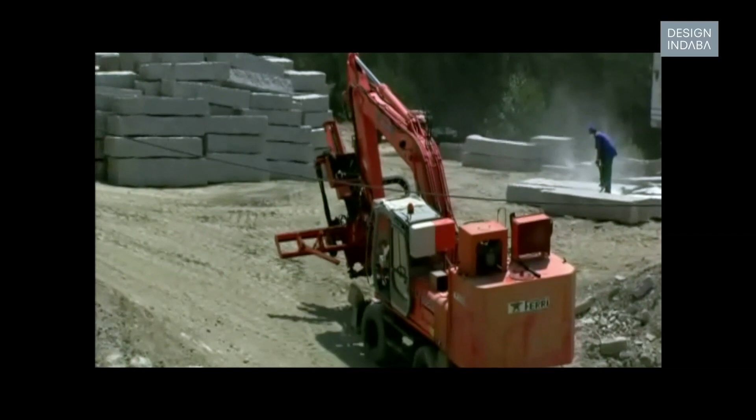We want to share with you our first emotions as architects, our encounters with the raw, still abstracted industrial landscape that is the source of our built environment, and how we learned how to deal with the tools, the people, the methods, and the technologies that have given us our palette, our toolbox to operate as architects.

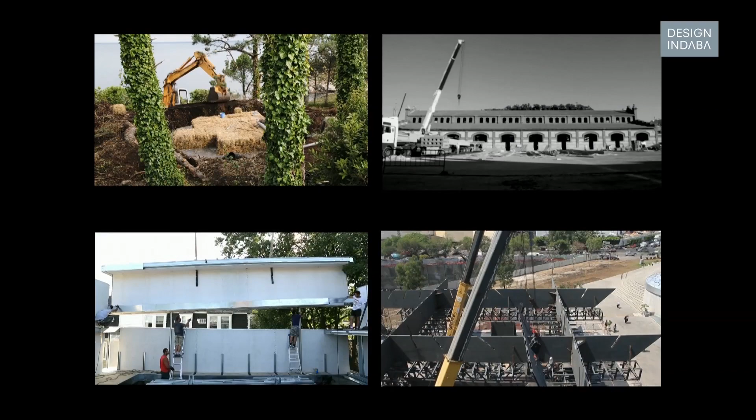Yeah, we've always been fascinated by processes of transformation in landscape or industrial processes, and we've always had the need to learn about how to bring the power of those processes into architecture and to develop, in a way, an art of building that can then be transferred into the spaces that we inhabit every day. And this is the power of design.

Design starts with a spark of creativity and intuition, sometimes a dream, it could be a desire, but it's extended to the production, to the capability of the designer to embed this into a human need without losing any of the spiritual and human benefits that our work produces in society.

And the end product, the spaces, the architectures that these processes generate can be sometimes very different, but actually are the result of the same understanding of how architectural parts can come together to produce a space. And we will be presenting here a few works that are very meaningful for our practice, that have in a way planted a seed that is now being reflected in a lot of the other work that we are doing, and that we actually built ourselves as architects, as contractors, as builders. So in a way, they have become the prototypes upon which we think and we experiment.

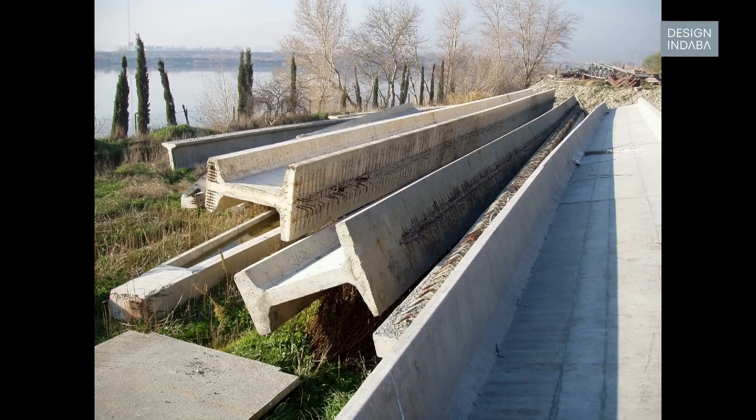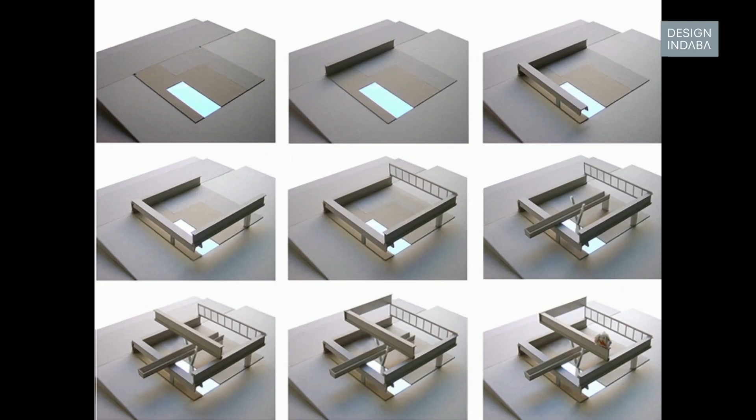So, off-site construction has to produce architecture without being physically embedded in its conception or assembly in the site. So it's a complete set of rules that changes the game of building architecture. So our first experience was about reinterpreting some of the materials the prefabrication industry was giving us, mostly for civil and infrastructural projects, and being capable to introduce all this into a domestic logic, into a domestic scale, to build a house with it.

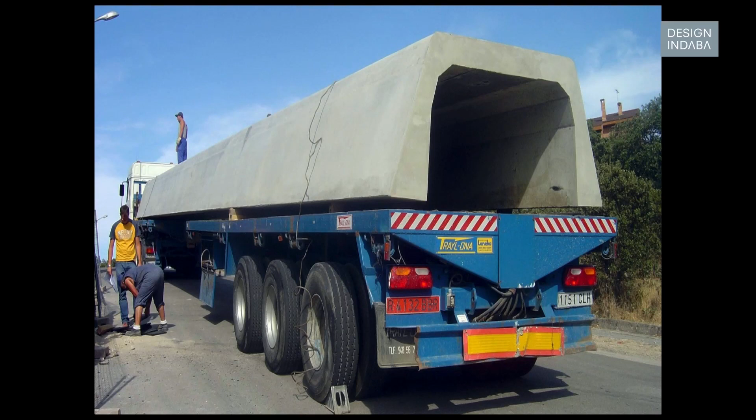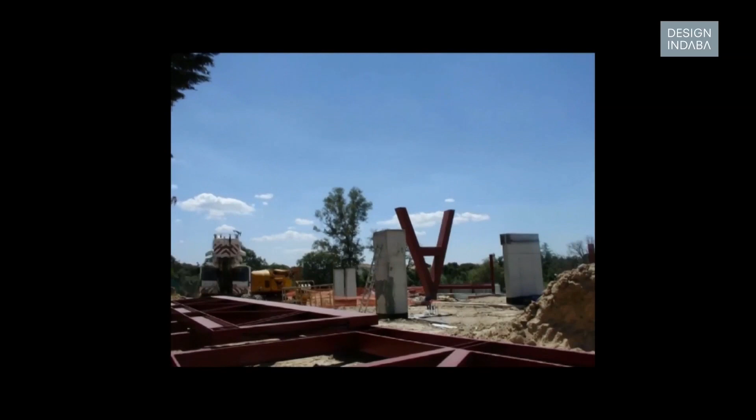Actually, the arrival to prefabrication techniques was a bit accidental. We went to visit a factory to get an idea of how these structures are built, and we found in this first image that we were showing this kind of cemetery of elements that did not serve any purpose, and we wanted to reuse them, and then we came up with this idea of building a dance, a structural dance that could reflect in the orchestration of the construction, but that would then build this space that goes around in the house as a helix.

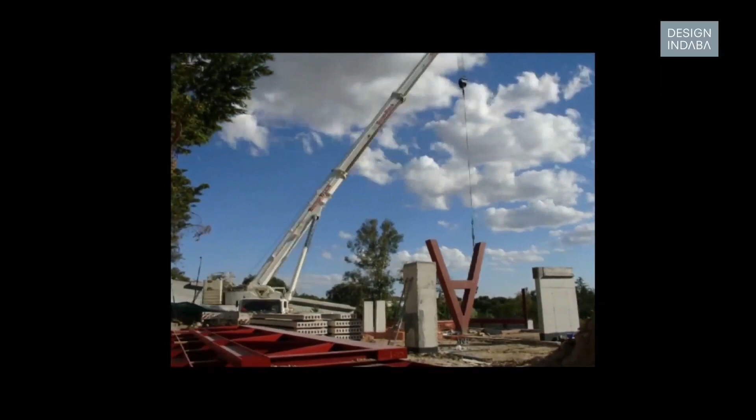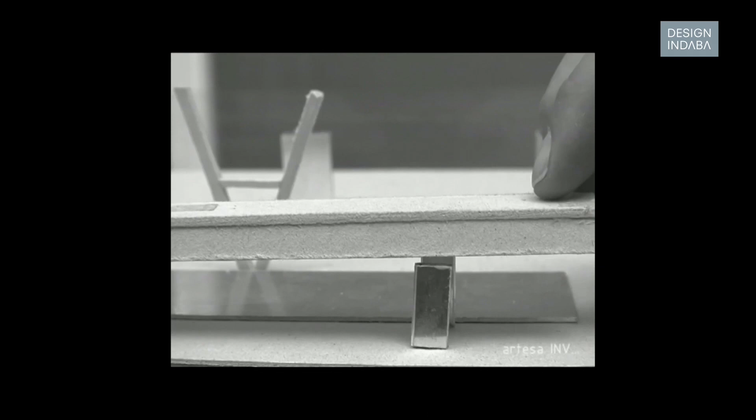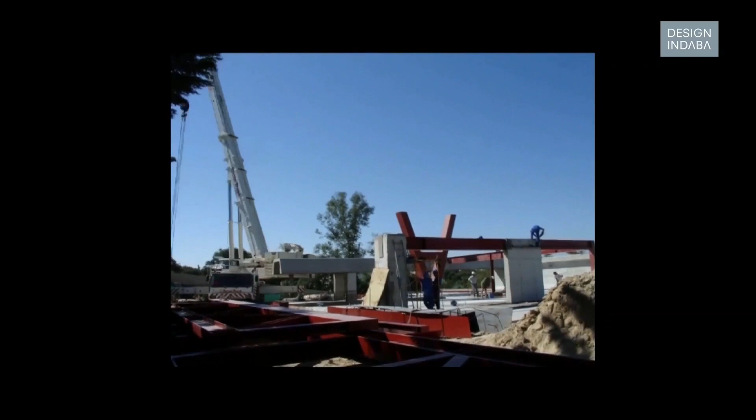So in our work, whenever we are designing, we're always thinking how everything is going to come together. The structure, the space, the process, it's all part of the conception, as you will see over the presentation, how we build the models and how those models reflect our process of thinking. And this video tells this story, how we design, and how we anticipate that design is going to be built. And there's a strange linkage between a conceptual approach as a designer and the industrial logic, the script that has to be developed to assemble and to put all these heavy pieces, heavy parts together.

So here we are decontextualizing, in a way, this technology. Where we come from, we see it building highways, building channels, serving this infrastructural purpose, and we were trying to bring this scale into the domestic space, as well as also start to understand what prefabrication means and how it can bring some values into this process of making architecture.

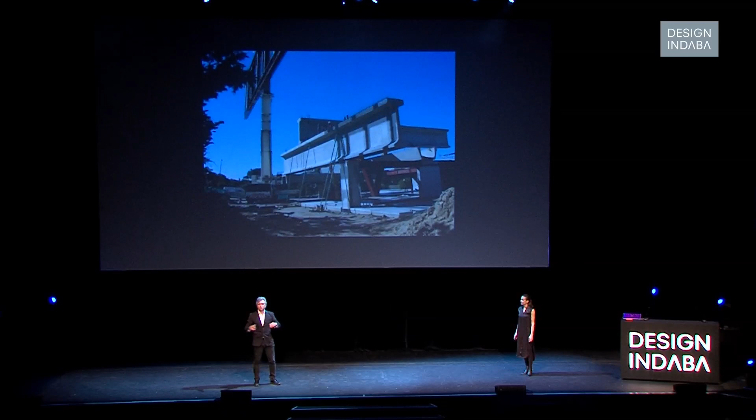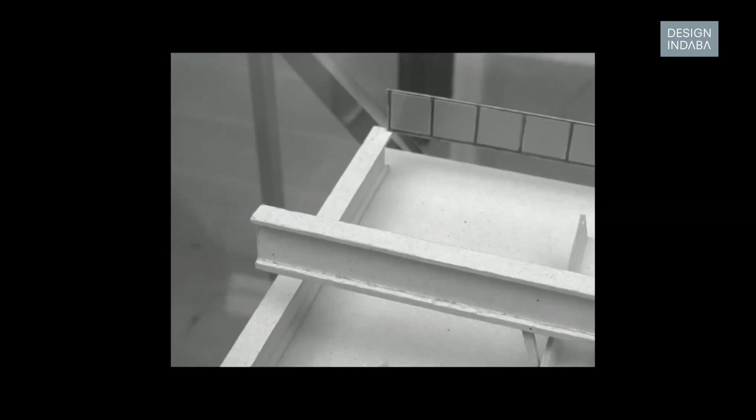So everything starts with a reinterpretation of the part, of giving different meaning to a beam of pre-stressed concrete, a soulless object that contributes to the transmission of mechanical stresses. We wanted to reinterpret all this architectonic language and to be able to trace a space that had a clear levity and characteristics that could respond as a house.

And we also found out in this project how, when we are dealing with elements that are fabricated off-site and arrive to the site, everything has to be fully engineered, controlled to the millimeter, almost creating a kind of high-resolution architecture.

So the design has to be absolutely processed so that when the performance of the construction arrives, there are not many surprises. Of course, in architecture and in construction, there are always some of them. And by making, we were the contractors of this house, we discovered the usage of gravity as our main substance, how this house is defined by the presences of these big archetypical parts, the beam, the stone, the truss. And this became a game where creativity and engineering were chasing each other.

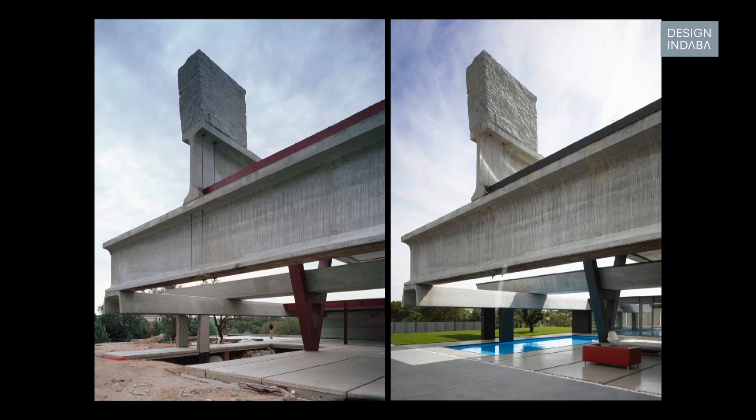And as artists or scientists, we discovered the strength of the structure to be the detonator of all the spatial emotion, the experience that ultimately is the goal of any architectural construct. We like making the most of the tools with which we are working and building architecture. So typically, when the structure is finished, the space is already there, and it's just a question of completing, enclosing, thermally, and waterproofing the architecture so that it can serve the purpose for which we are building.

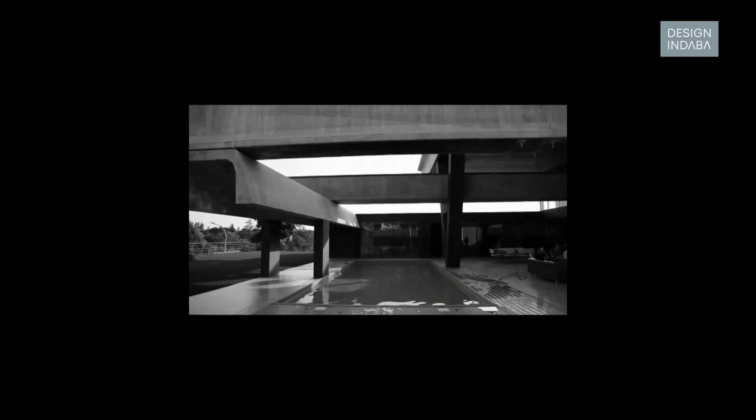And this is our house in Spain, and we like experimenting on ourselves before doing it with other people. This is where we live now part of the year because we moved to Boston. This is where we celebrate parties, and this was filmed during the World Cup in 2010 that happened in South Africa. I'm not going to remind the result of the World Cup, but we were filming this actually for an exhibition that was done in Venice, curated by Kazuyo Sejima, that was called People Meet in Architecture. So we wanted to show the way in which life happens in our home here.

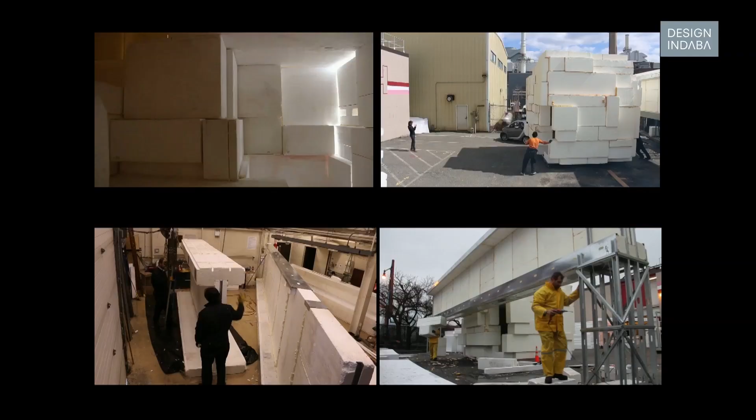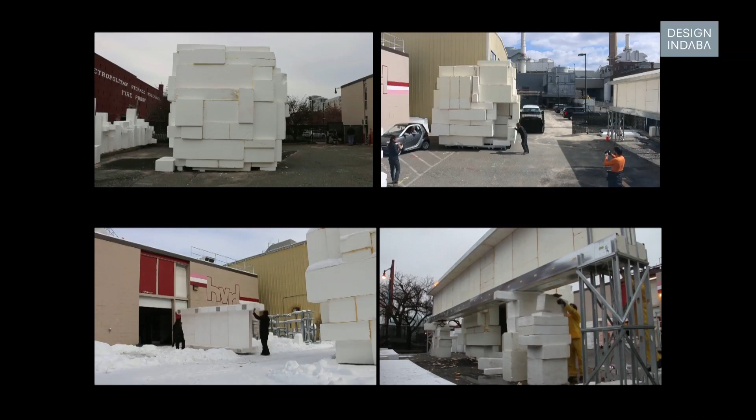So with this house, we learned to deal with weight, and we enjoy the capability of weight to produce very intense architectonical spaces. But we started our research in our lab at MIT, trying to maintain the weight as a presence, as a space, without the burdens of mass. So we built rocks that had no mass, beams that were able to span enormous lengths without having to lift them with heavy machinery. And this inspired us to produce a set of projects where the firmitas, the solidness were attributes, but they were ultralight in terms of their massivity.

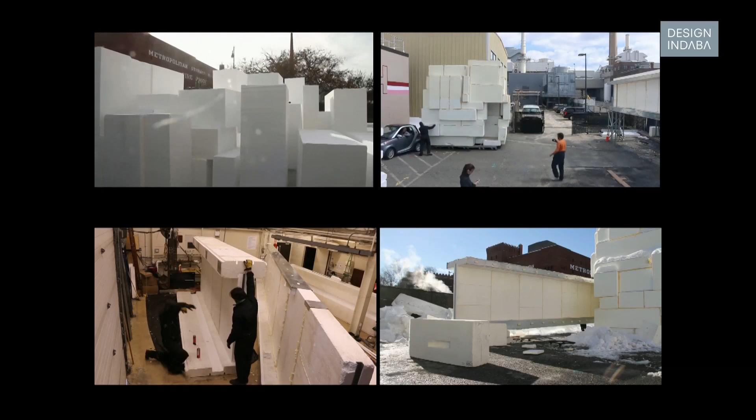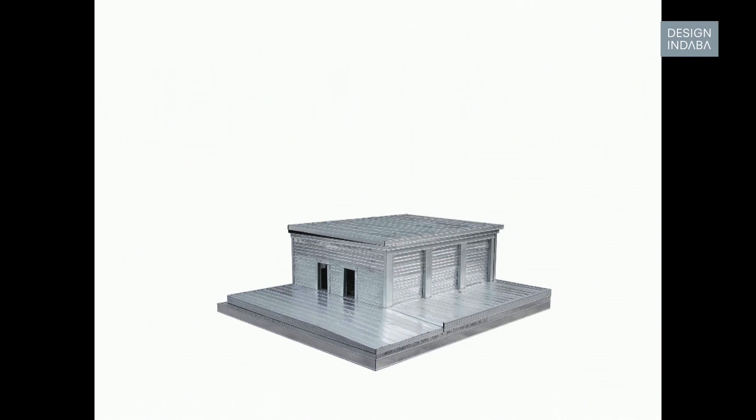So we are doing this research in Boston. Just when we displaced ourselves, we moved from Spain, from that amazing house you saw. And we arrived to Boston, and we had to find a place to live. And of course, for us, it had to be an opportunity to do something. So we found this ugly duckling in a nice neighborhood with very good public schools for our kids. So we decided to buy it, and it had a pretty solid construction, concrete block, and we lived there for 2 years while doing the project and also starting the conversations with the city.

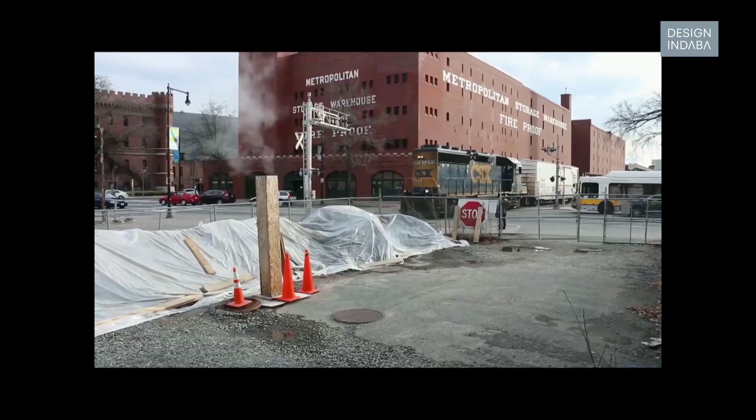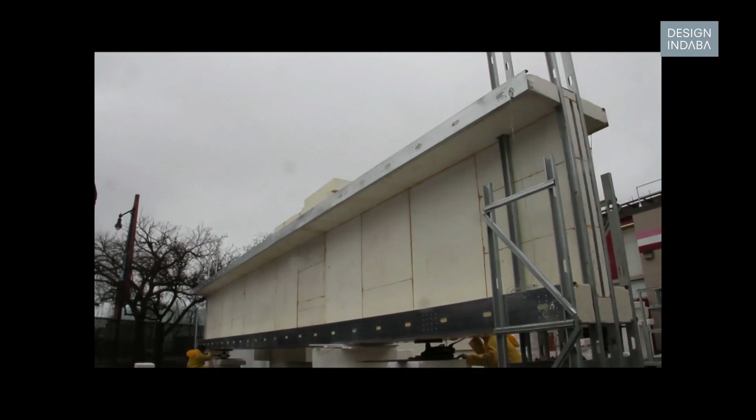So again, we stack beams, as you have already realized. No? But these beams had to be very, very light. Firstly, because we wanted to explore the off-site construction to the extreme. We built this in Madrid, and we shipped it to US. In US, everything arrives in boxes, so there was no big deal to bring the full house. So as part of the creative process, there's also a research that, as we mentioned, started. The science was inspired in our lab at MIT, but immediately we wanted to spin this off and build in the real world of the architecture with all the constraints and all the beauty of it.

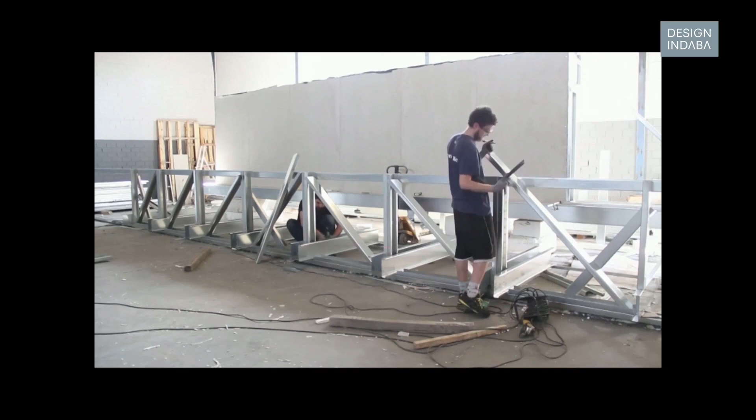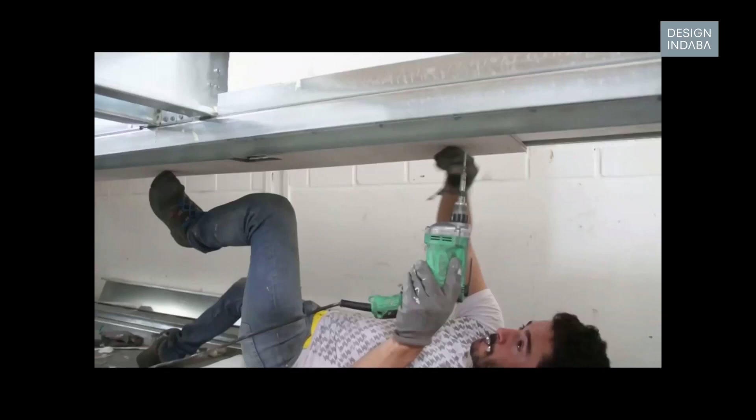So we went back to Spain, set up a shop with students, young designers, non-skilled labor, and we made a workshop. So we are doers to the extreme, and we developed the craft and the systems to be capable to transport all this back to the United States. And what's very interesting is that with the Hemeroscopium House, we were depending on a precaster, specific industry, but here we are managing to find a way to prefabricate these large-scale elements, but with really very basic tools and technologies that are available everywhere in the world. So we are doing it ourselves with our people in the workshop. You know? Again, researching and experimenting and allowing ourselves.

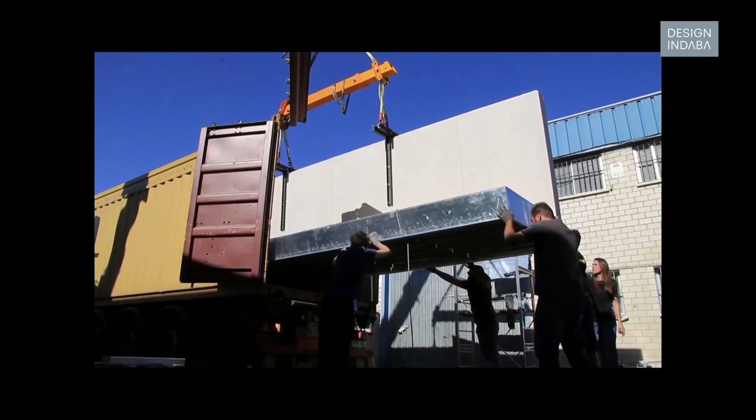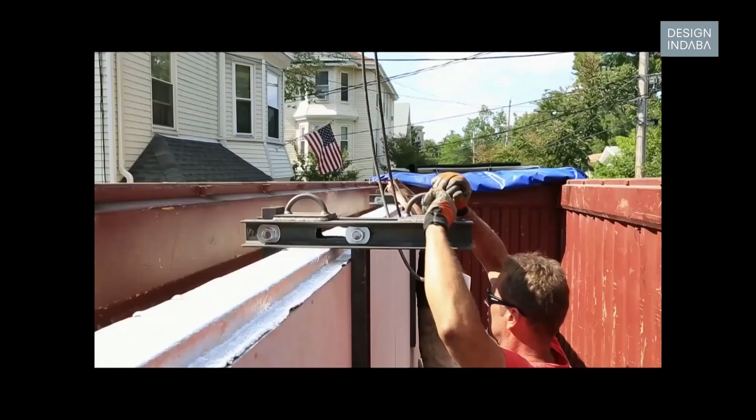Believe me, you cannot wheel a beam like this if it's pre-stressed concrete. And you cannot even put it into a container box. So this is what, as architects, we wanted to explore, the capability of a building to ultimately be built out of the terrain with a different technology, hybridizing two traditions, no? The North American framing standard with the European, let's say, solidness and scale of these big chunks. No? And just imagine this moment.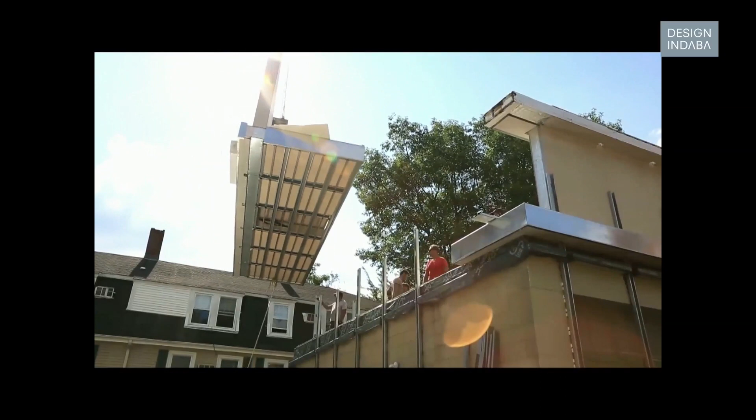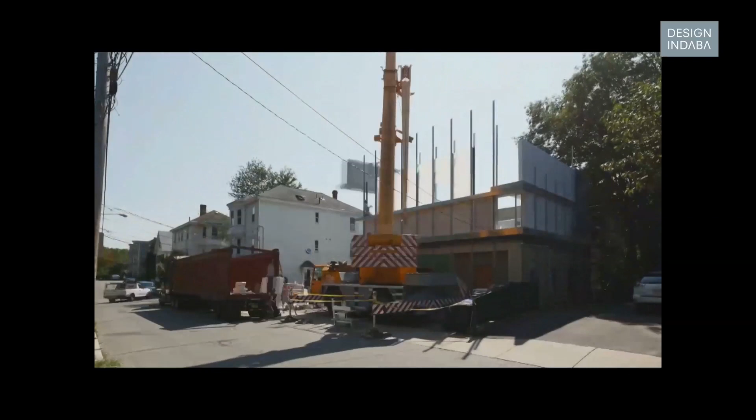When we had done prefabrication before, it was in Spain, more or less local, but here we were bringing these elements from Madrid in containers. It could not go wrong. No? They really needed to fit. And it was a very exciting moment. I think also for the neighbors, because as you can see, the fact that these elements are quite large makes the assembly process an easy one. Also, the crane is very reasonable, nothing to be worried about.

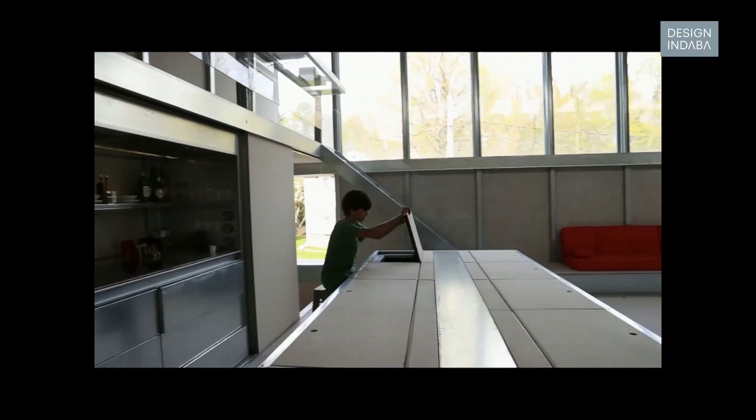So it was interesting to assemble the house in 7 days, like the 7 containers that were transporting these elements. So all this transformation, all this development of this technology to be capable to produce a very interesting space embraced by all these walls, very open to nature, without the mass, but with all the comfort and all the solidness that a construction requires.

This invited us to continue this process, to elevate it to a collective housing or to a problem that incorporated other variables within the city of Boston. By the way, this is the secret of the space. It's what we call a multipurpose domestic, where we have all the functions in this one big room. It's not a big house, but the fact that all the volume of the house is given to the same space makes it actually very monumental.

So as Antón was saying, it's this idea of building with very locally available materials, very simple, understanding the logics of prefabrication, but actually understanding that the luxury of the house is in the space, is what we are now working at a larger scale.

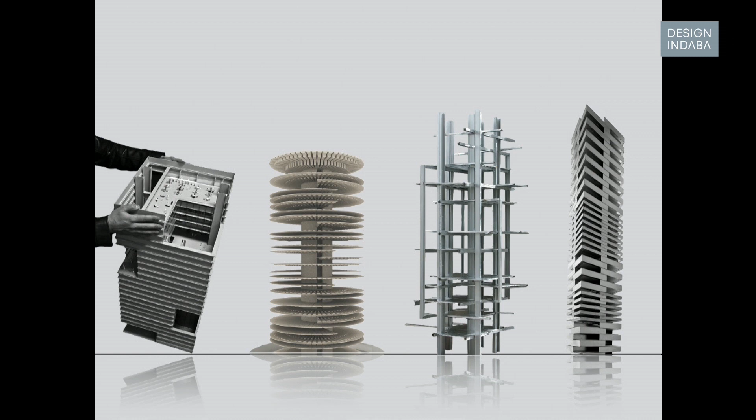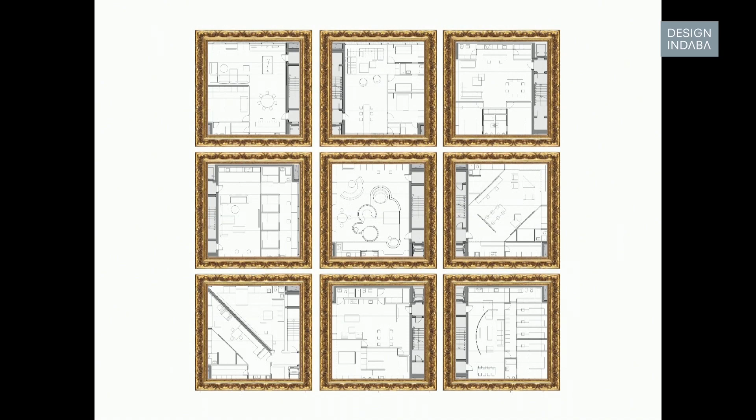So these systems have been pushed to, I would say, the next level of complexity, the collective housing, the framing of all these individual differences that is our lives. Trying not to impose any kind of scheme or a program, because all of our lives are essentially identical. We have the same needs, but fundamentally different. So we understood that we as architects were just required to provide those basic platforms of space, infrastructure, without compromising the life of the users.

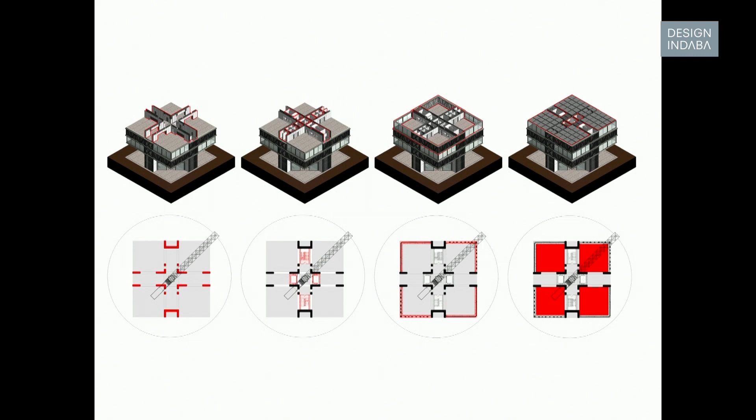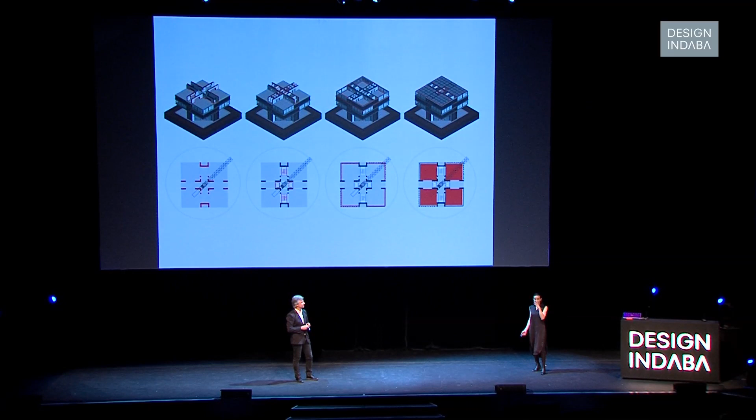So we applied all this logic, trying to generate the systemic, affordable, semi-automated construction system that could bring together into collective communities different ranges of income due to the industrialization of all the housing process. So all that we have experienced building our houses, and especially this last one that we were showing, suddenly gets an immediate application into a larger scale, for a larger purpose as well.

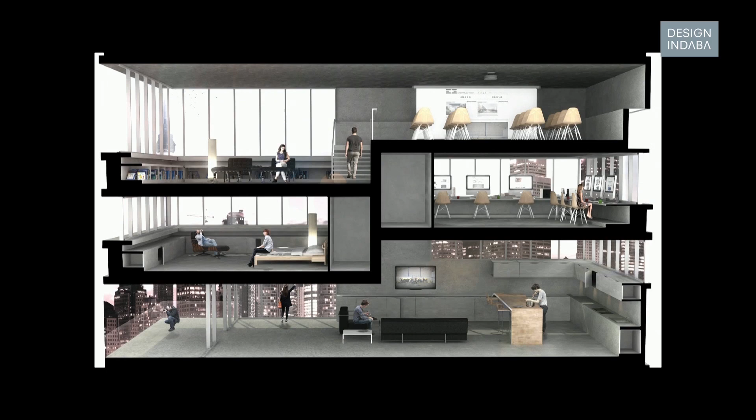So the idea of designing a building that contains people, and giving a strong identity to it through form or through materials was kind of pushing us away. We wanted the idea of a very flexible, stackable, free system of space that could give the user the ultimate voice, the ultimate word of customizing and finishing their own habitat. So we departed from these clear structural systems that could be automated, that could be done rapidly in a very affordable way. And we understood that this was the canvas where everybody should create their own lives.

And then, of course, because we've built our house and we know what it costs and also what it looks like it costs, we are very confident that we are able to take this kind of quality of the architecture into the scale of the collective housing, and we really believe that we are able to bring together different levels of income into the same architecture, reflecting, in a way, society.

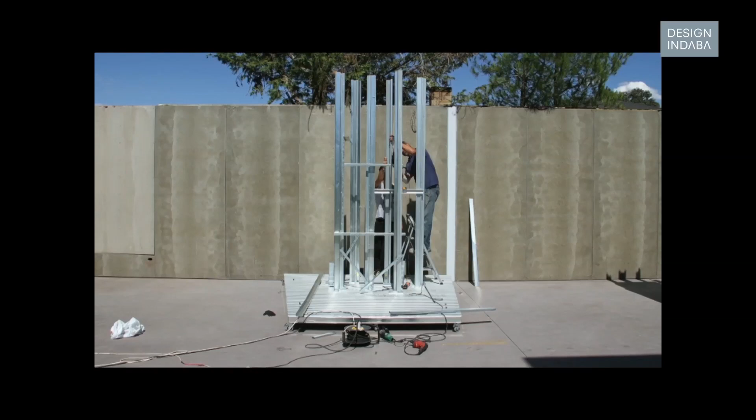And the next is to adapt all this logic into the urban scale. And here is where all the variability, the randomness of people is what really creates our cities. Just the idea of trying to plan a city has been historically a great error. But the idea of introducing all these uncertain variables into the design process, as we are showing in this video, where all the Ensamble Studio was participating in this connectivity, in this assembly, without a programmed design. In this case, it was the performative actions of all of us incorporating all the system of connections and structures.

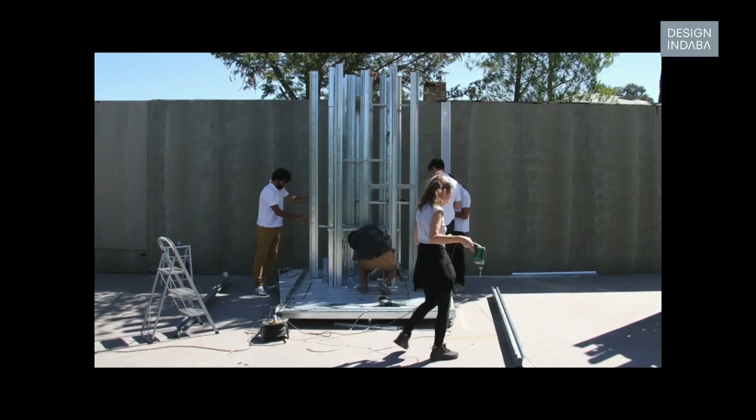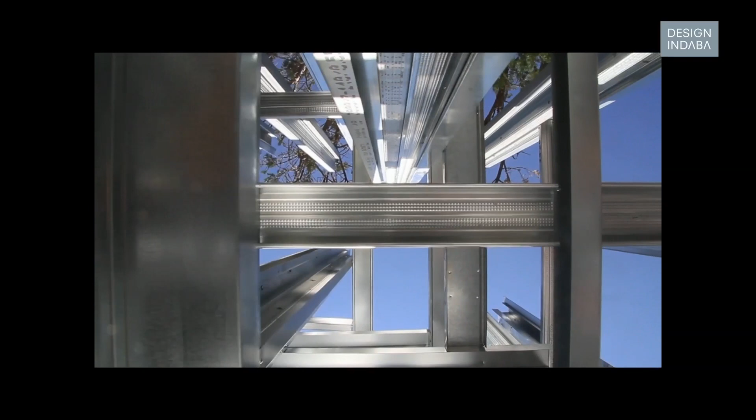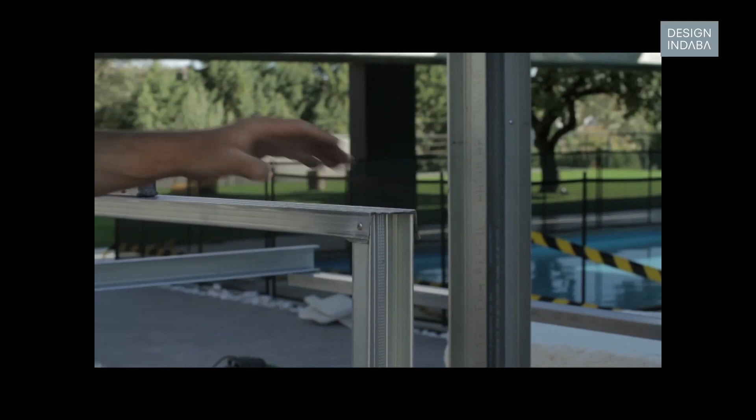Yeah, we are trying, with these design processes where there are different minds building the architecture in a way with the same direction, to find this diversity in the spaces, also in the vertical structures, because I think there is a lot of imagination still to be placed into the way in which we build vertical structures versus the horizontal ones that, of course, because they are connected with the ground, they have different levels of transparency.

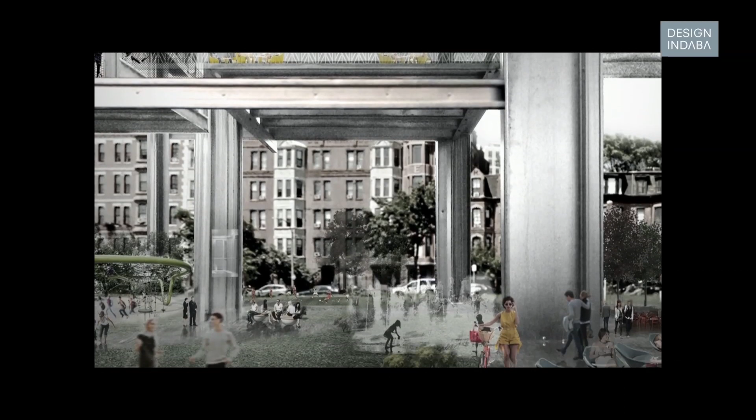But today, technology really allows us to push those concepts. And this is our vision of the city, this almost craziness of interactions, of different people, of tensions. We understood this as designers as a frame where all these activities could occur. The same idea that we did in our house, extended to collective housing, extended to the urban. The idea of flexibility, something that could be dismantled and redone again, required a particular scale and distribution of the structural parts that constitute the three-dimensional city.

So when Alejandro Aravena invited us to participate in the 2016 Venice Biennale, which had the title Reporting from the Front, he was asking us, like, what is the front you want to report to? And it's this vision of the city that needs to be more diverse, more creative in terms of its structures and its architecture, so that it can inspire that in the people that inhabit it. And that same vision

has a counterpart in nature, because I think this is the pending conversation that we need to think. When we think of the city, we inevitably need to be designing also and thinking about nature. And our position seems quite antagonistic, maybe, and you will find out now, but for us it's completely related. When we look at nature, we want to learn from it, we want to build with it. So this drives us to the site, to on-site. And on-site means to subdue to the logic of the site, to its history, to its memory, to its materiality.

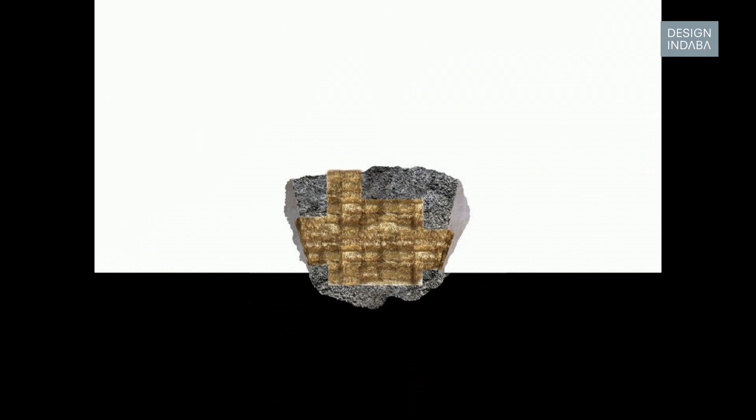So we had the opportunity to build this project where we dug a hole as a first action on the site, introduced part of the vegetable, mineral, and animal participation of the site, as a process that broke the architectonic system tradition, but was perfectly embedded into the roots of the natural environment and the vernacular that we were dealing with. All this construct needed some energy given by a little cattle that we invited to participate in the carving process, with the time that it needed and with a completely different set of rules than all the prefabrication, automatization madness that we have previously explained.

So if we were showing before this high-resolution architecture where everything needs to be absolutely controlled to the millimeter, with this other architecture, there is a moment where uncertainty plays a very important part, and we relinquish control. So giving the time to nature to provide its own forms, we as architects were just interceding in the process, trying to comprehend the material consequences and the spaces that were given almost as a fruit after we were rooted into the terrain.

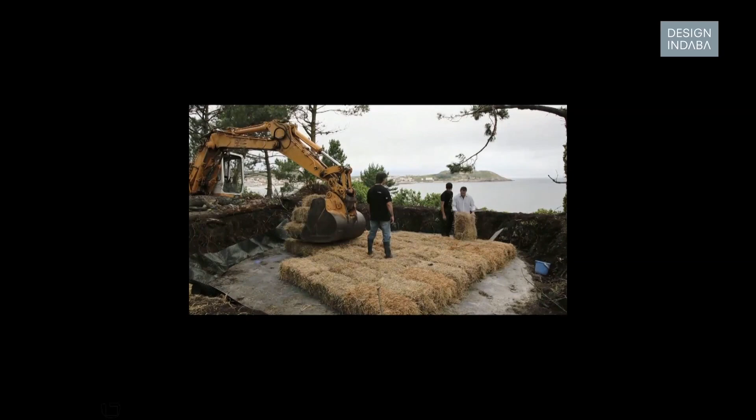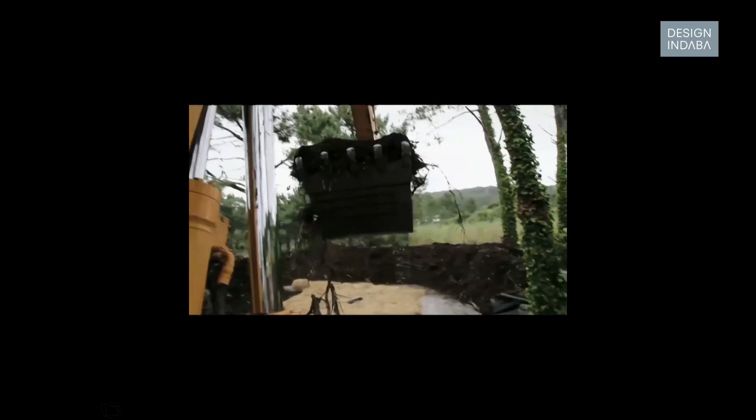So we understood that all this layering, almost magmatic layering of masses that we recreated as human 3D printers, controlling all those layers that were casting slowly all the aggregation of the structure, was part of a natural system that we were manipulating. So again, this is another experiment where at the moment we didn't know exactly what we were looking for. We were just willing to experiment with concrete in its liquid form and seeing what kind of chemical reactions it could provoke with materials that were completely local and available on the site.

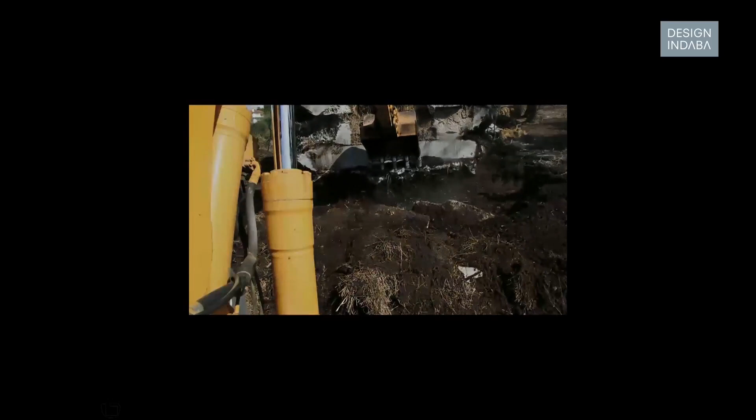But this was not yet an architectonic process until we started making cuts, chops, carving, cleaning, and discovering all the extraordinary materialities that the process was offering us. Ultimately, we wanted to acquire a very strong emotional connection with the place. And this is through the material world, through the corporeality, through the body of the architectures that we are building. So here is the moment where we have followed this recipe that has really no architectural plans that can help to build it. The cow has helped in this process of extracting all the material, and we're about to discover how the space is inside.

Now, this is a moment of absolute excitement that I didn't really know that architecture could bring, no? To me and to us as designers. We didn't fully know that we could be surprised in such a way by our own process or our own works. And Paulina the cow, and we named her Paulina in honor of Paulo Mendes da Rocha, just inhabited the space. We helped her remove all that hay, all that dirt, all that hairy concrete, all that life that occurred during the full year that all this process came up, gave the structure an enormous soul and a very, very strong materiality.

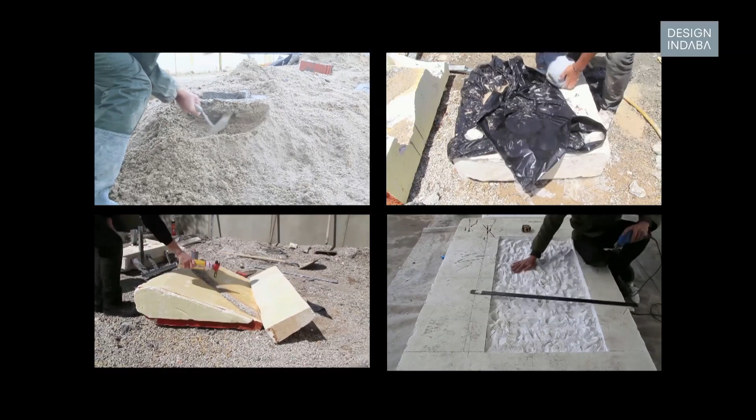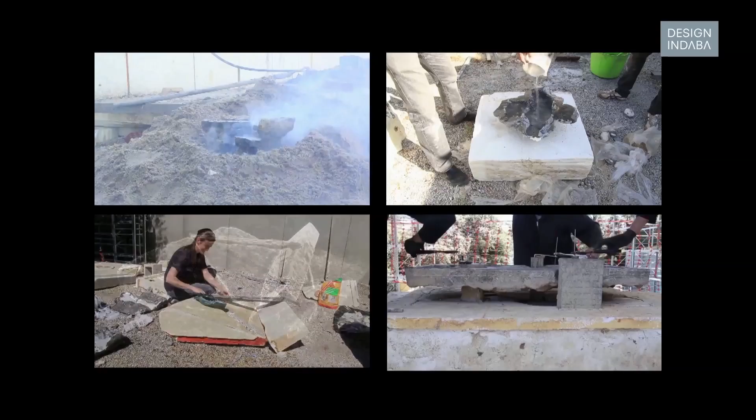So here, as architects, we faced a grand dilemma. What do we do here, in this non-referential space with nothing but the most sublime, outstanding, untouched wilderness? So we decided to try to get rid of architecture and start from the beginning, trying to understand the geological processes, the pressure, the forces of nature, like explosions or hydraulics or gravity, all these outstanding natural conditions that create our physical world that we try to dominate through architecture.

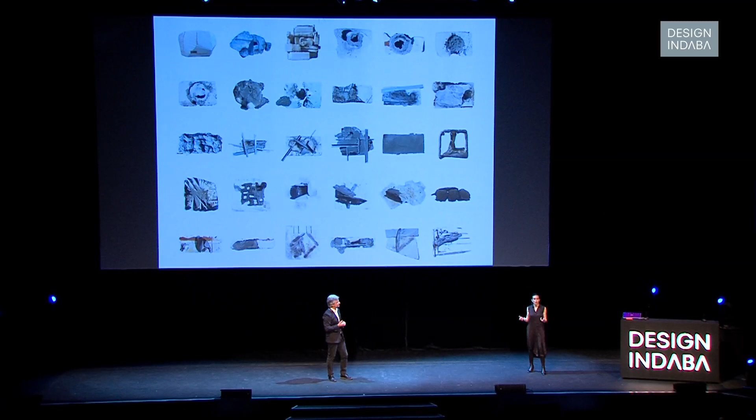In this case, we wanted them to be the action, the performative action that we just operated with. So the project that we designed with our clients became, instead of one building, a constellation of spaces, of these architectures that would develop this map on the site, where each of these open-air rooms would encourage without fixing a different function.

So each of these architectures sometimes have specific properties or an infrastructural nature to connect, or they actually connect with infrastructures existing on the site. So in a way, they are trying to understand the places where they are located and resonate with the landscape to make it inhabitable. So the poetic approach to nature was to bring to the material world all those resonances.

For example, in this project, we wanted to bring physically and phenomenologically the presence of the mountains as space and also as acoustic space, to hear the mountains. In these three projects that we built, we tried to serve the program, the entrance, music room, but still make these long, almost spiritual connections with the terrain.

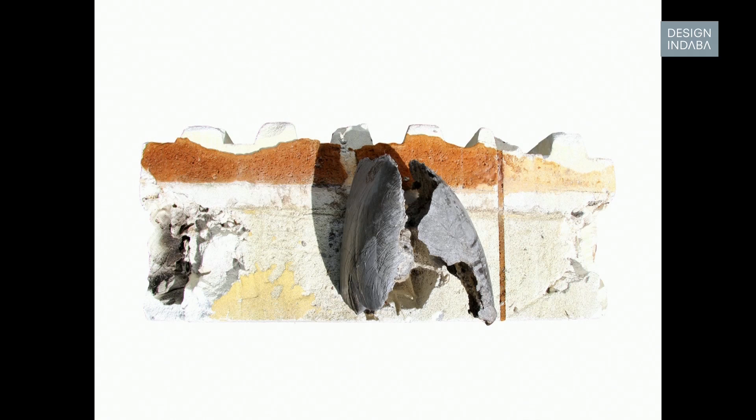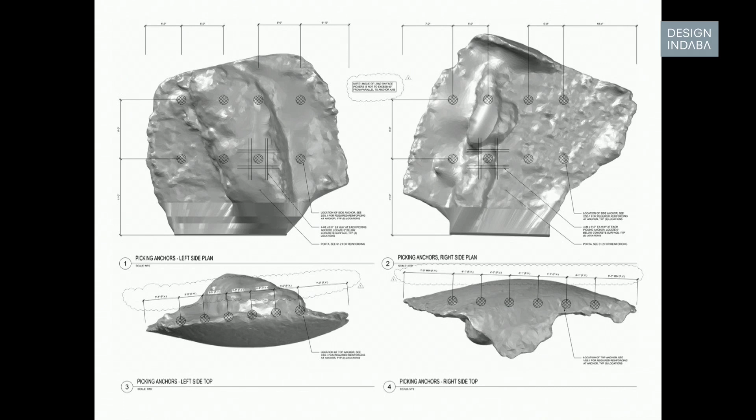So the first two that we built, very intelligently from the part of the client, were the smaller ones, the ones that would allow us, again, to test the ideas that we were proposing and see how they would fit on the site. And they are very symbolic in the way that they are situated in the access points, and they mark those landscapes. And the process of design, again, is from the model. We are working with our hands and thinking at the same time.

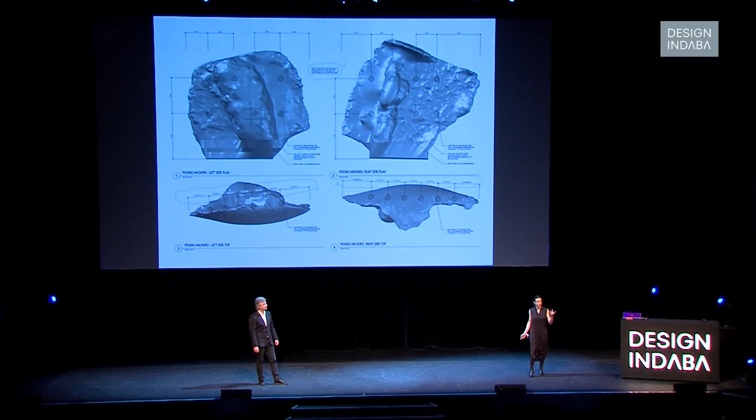We are producing these models, and then we scan them, and we extract all the information that we need for other purposes, like stamps and making it legal, and then, again, the process of construction becomes fundamental and is embedded even in those documents that we are producing. So we are creating the architecture, but we really have to come up, especially in this remote place, with a feasible way of building them that matches also the poetry of the project.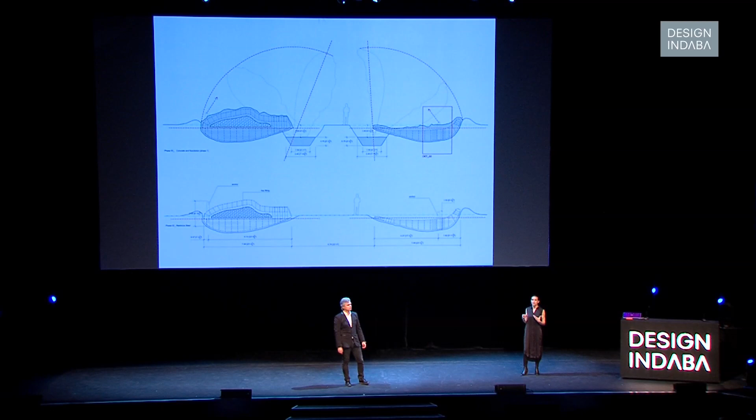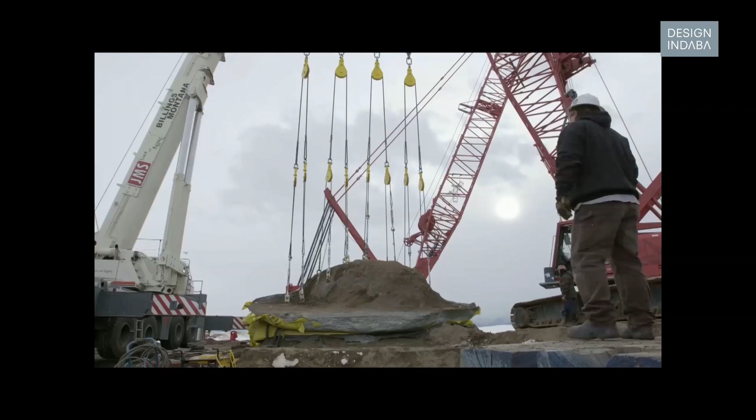This project is about a space that is almost extracted from the ground. So for us, it's very important that the process is able to convey that idea as well. So all this letting the matter ultimately do the design, just manipulating slightly, had to be checked with a highly precise engineering control. So here's where we dealt with these two apparently disconnected processes of design thinking.

First of all, we gave all the uncertainty the value that it requires, and the creativity the liberty that it needed, with no formal predetermined departure to create that arch. But we controlled, as architects, as engineers, how all these surfaces, all these textures were providing this internal encounter of gravity and the birth of these architectures.

And here, we already know some things that we have learned building the Truffle. We already know where we want a rough concrete that expands and extends the canyon, or where we want a shiny concrete that will reflect the clouds and will refer to the landscape in a different way.

And these two doors, this is the other one inverted, which inverts the conditions. So the smooth surface is inside, the rough is outside, has a similar construction process, but then creates this other effect of reflecting or bringing in, instead of the clouds like the previous one, the closer landscape of the earth.

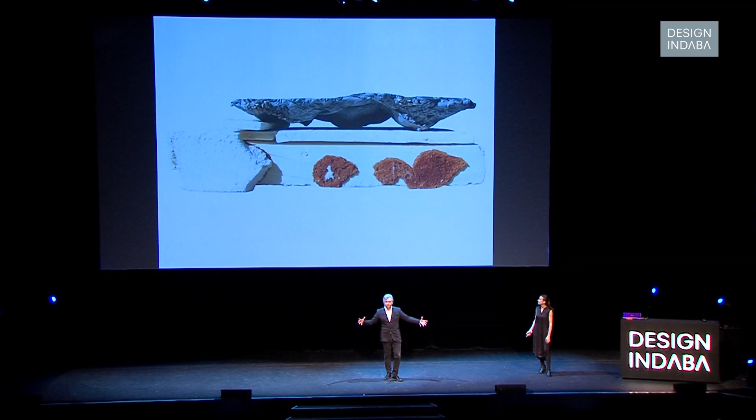We want to finish with the last of this structure of landscape, Domo. Domo is the dome, it's a house, it's a cavern, it's a very archetypical space that has a cave shape but without the mountain. But ultimately we wanted to recreate those hills that generate the topography of the place and be able to use that space as a resonator.

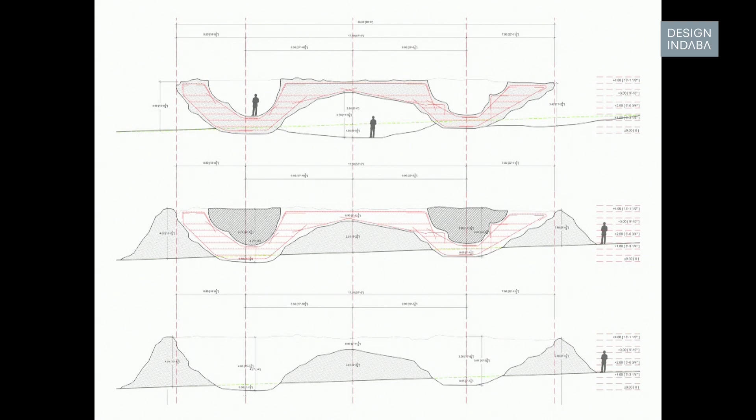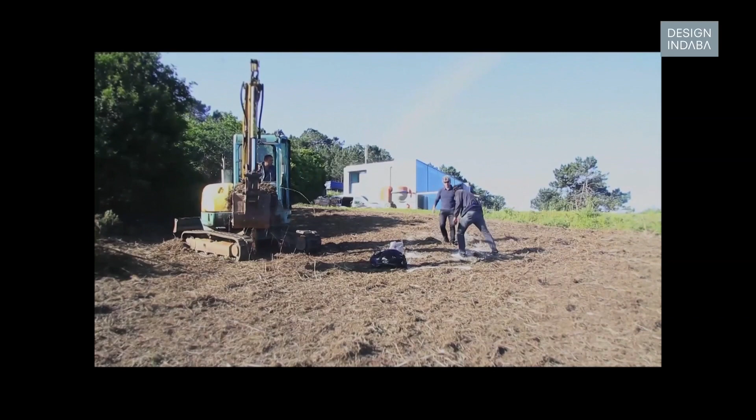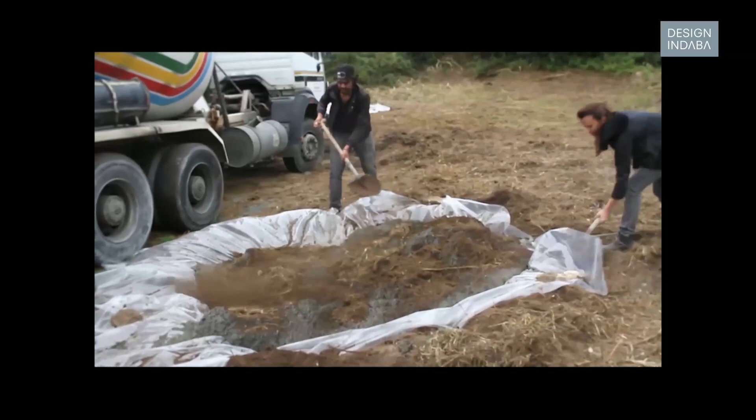We went back to the model as a totemic performance action where we rehearse and we play and we discover everything that will be, let's say, upgraded and upscaled to the engineering side. But in this creative process, again, we honor the model as our first document that we have to interpret, we have to look at it with different angles, perspectives, and be able to transform it into an architecture in the proper human scale.

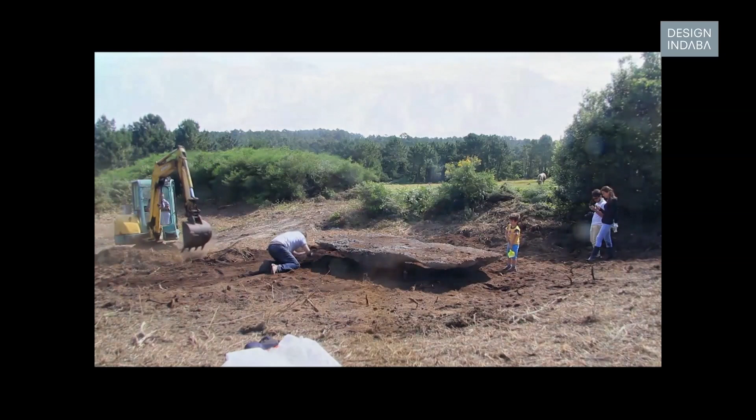So the different scales of models refer also to the process in the design that we are in. So in this last one, we are already rehearsing how we are going to go to the site, like we are doing here, and we are going to actually perform and get this architecture built with those people that have to help us get it built.

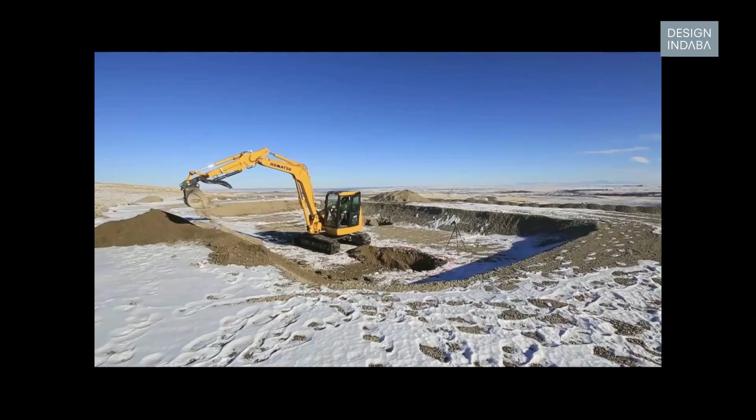So as you can see, all this game puts together our artistic sensibility approach to nature with a newly developed technology that has to respond to that will. In this case, we compacted a thick bed of gravel that we borrowed from the roads that were built to access. And we use that, again, as an almost dry, open canvas where we could emulate the erosion that in the hills is given by time and wind.

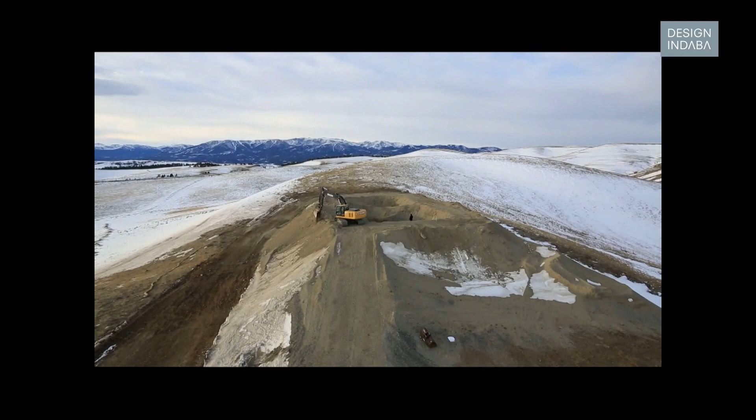In this case, we used a retroexcavator and the previous models as a template, but not as a strict guide. So all this space between the uncertain, the matter that is going to impose its own forms, pressures, and textures, and the requirement to fully engineer all this thick and ponderous structure is where we have been operating in this project.

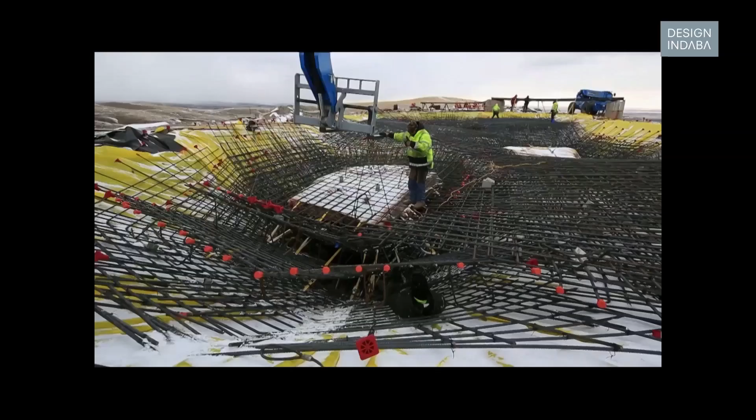And here, when we are already on the site, is when the ideas need to be translated and adjusted as needed to the local conditions, to the materials available, the knowledge of the people, and also bring that knowledge into the project to enrich it and to make it possible. And then the weather. In this location, the weather is extreme. It was really difficult to have any control over the time of the construction because we are pouring concrete in winter time, so the temperatures dropped.

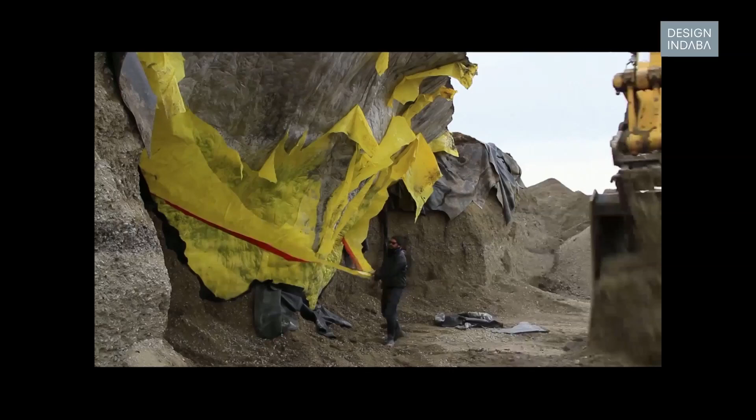And it is a project where we really realized we were, in a way, at the service of nature and its elements. And it was quite beautiful to integrate that part into the process, because this architecture that, again, as in the Truffle, we are here discovering and unveiling almost like an archaeological structure, it wants to belong to nature. It wants to be appropriated. It is great if it changes with time. It is great when the snow changes the color or reflects on it. And it actually belongs in a strange way to the land, at the same time that it looks artificial.

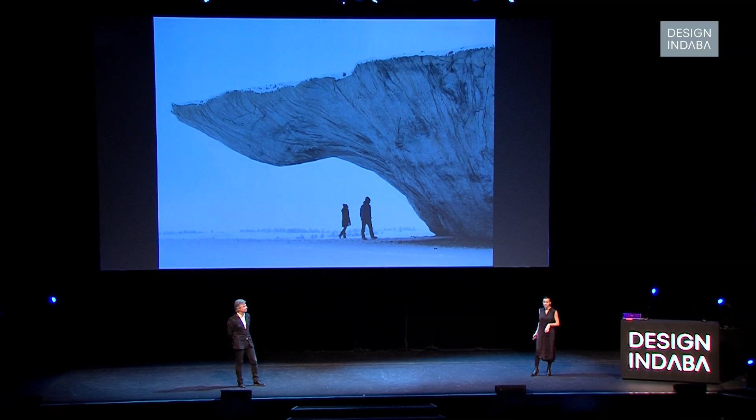So it has this ambiguous condition between maybe art, landscape, architecture. It does serve the architecture purpose of reflecting and serving as an acoustic space to have concerts and performances. But it can be completely alone. It doesn't need to have a function to exist. It doesn't look like an empty building, and it doesn't need to be maintained, which was very important given the scope of the project and the bigness of the site.

So ultimately, the message of architecture dealing with landscape is to serve all the needs that we have as humans. In this case, it was providing shelter, an acoustical shell, and hosting open-air concerts. But I think there's a more profound ambition that has to do with making a very, very strong connection between the material world and our own human experience, our own capability to connect spiritually with the site.